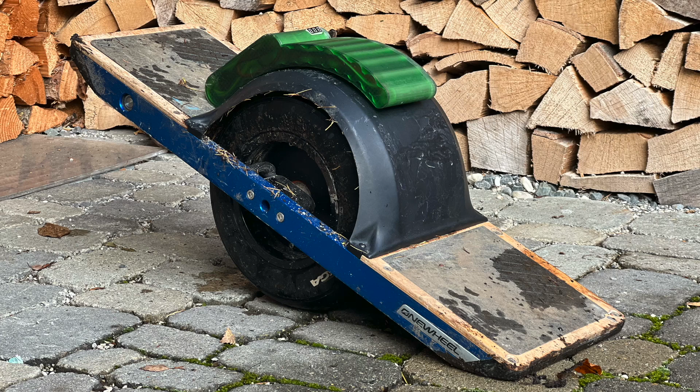So guys, what you see here is actually the result of this video. I'll show you here in a video. Actually, it's gonna be two parts because it's too long. First, a little bit of theory, why and how to build an external battery to a Onewheel One, which is also interesting for the Onewheel Plus and actually for the Onewheel XR, even though the difference is the internal battery of those Onewheels. But I'll come back to this during the video.

So this is my first video of a Onewheel battery build, and actually this is probably my first real battery build ever. So if you're interested, it's quite a long video, but I'm trying to cover everything from theory over planning into building, test running it, and the summary. Have fun.

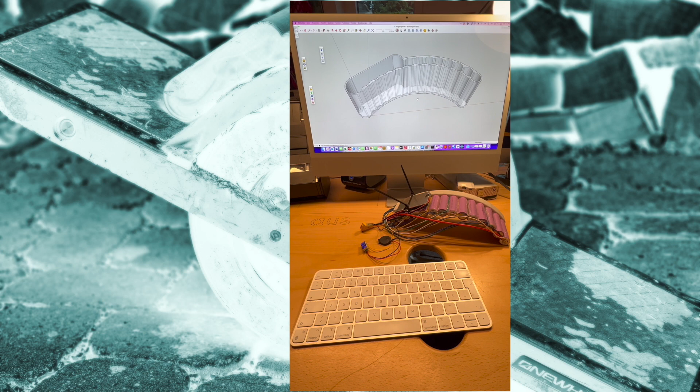So welcome to this video. It's a DIY tutorial about a battery I built for my Onewheel version 1.

I have to give a summary about what I think I know about the batteries in version 1 and in the other versions. So what I know is that in version number 1 there's a 16S LiFePO4 A123 battery cells in the box in the Onewheel, and this battery

can be replaced. I have a used board now, and it's not running very far anymore. So I thought about putting new batteries into the board itself, but I think it still has 70-80% of its original capacity, so it's not completely useless. And what could I expect? Yeah, to just gain another 20%.

But of course, the Onewheel One does not have a great range, so many people play around with range extenders. So I thought about buying a range extender. So in the end, for me, the only option would be to really plug it into the charging port, the XLR plug, because I don't want to open the board, and I don't see any bigger advantages of directly connecting the two batteries, because there's a lot of current running between the two batteries then, and this is something I think people don't really take seriously enough.

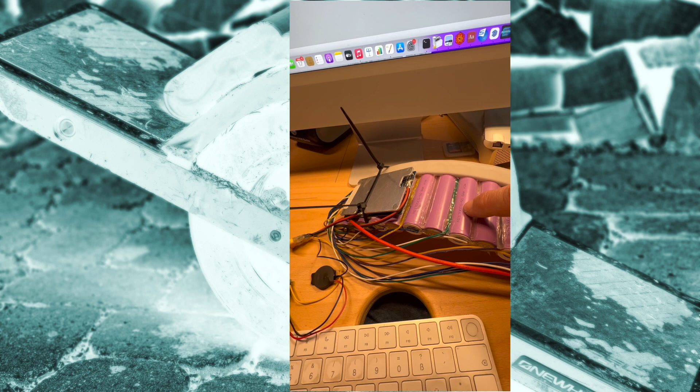It's a 14S. This battery is called BAK N21700CG-50. I'll tell you more about the battery later. So this takes the 14 cells. There's a normal standard BMS that can do 30 amps out. Well, we need 3, 4, 5 amps, officially 3.5 amps to put into the Onewheel. So that's fine to have a small BMS.

I couldn't find a smaller one. I would have taken a smaller one if possible. Yeah, they're just normally in series, so you end up with 14 cells. This is actually everything of the build, and of course I shaped the box. You see here, it's the holder of these 14 batteries.

They're already glued together, so I just take it out of this cradle and push it into this one here. These batteries are going to be glued in a little bit to the bottom, because they have no structure above to hold them down, but they are all glued together. On top there's a BMS area in here, and there's a little window already made for the volt indicator, for the voltmeter, and a little hole here that will take the XT60 plug socket.

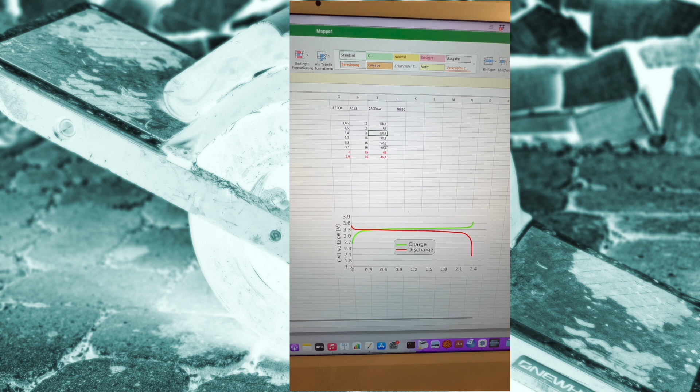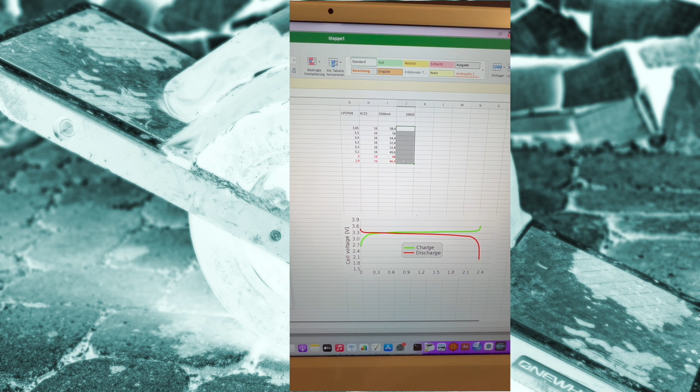So for 80% of your ride you will be in between this and that, between 52 and 49. When I have the voltmeter on my board, in the beginning it's somewhere at 54, because the moment you start riding your motor draws power and it drops. It rapidly goes to 52, 51, 50, 49, and then it goes quickly down to 48, 46. This is actually what you see in your app, from 100 full to 0, where your board stops driving. It will warn you. So what do we do with the range extender here?

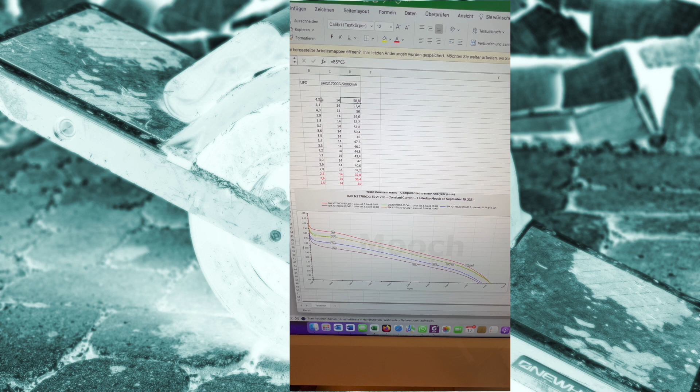With the range extender, first of all, we're talking about 14 cells that are full at 4.2 volts. That gives you 58.8, which is what the original charger of the Onewheel does. It's a good coincidence that 14 times the LiPo is roughly the same as 16 times the LiFePo, very close. So the moment you plug this battery into the charging plug outside your board, it will start charging the battery.

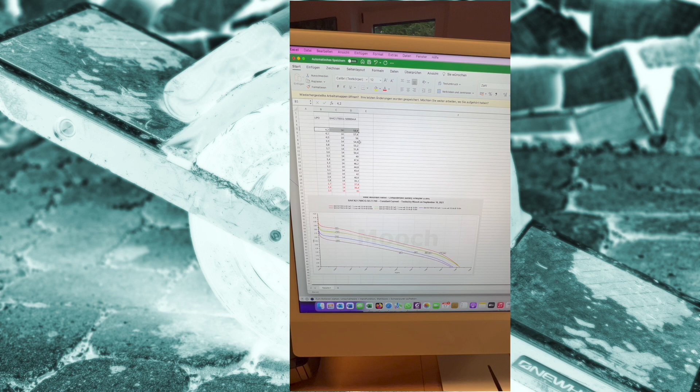And it will charge it with 58.8, like in the ideal world. But of course the motor is running, so it will all go down to 54 point something while you're driving, or riding. So I would strongly recommend to plug in this range extender once you are below 80 maybe. So that's early enough. Don't plug it in too early, otherwise you get some warnings that it might overcharge.

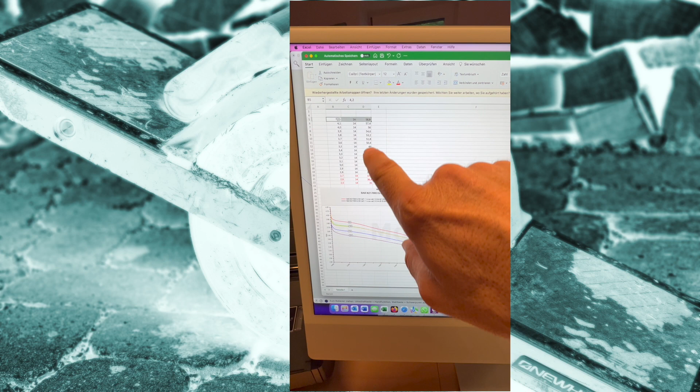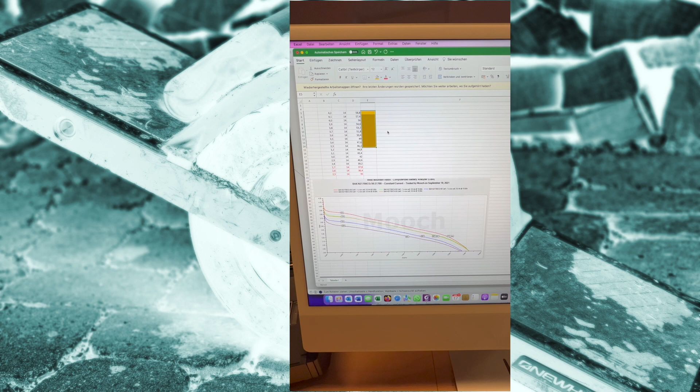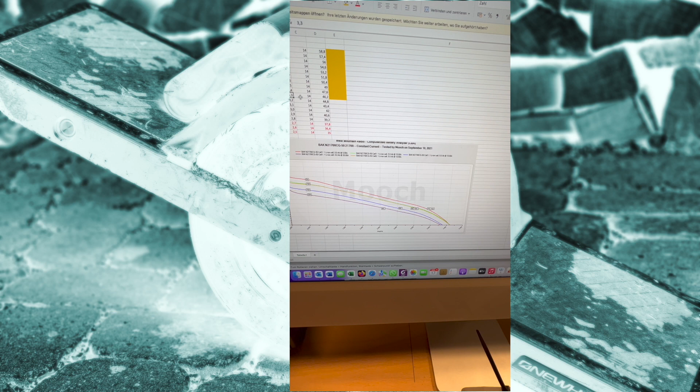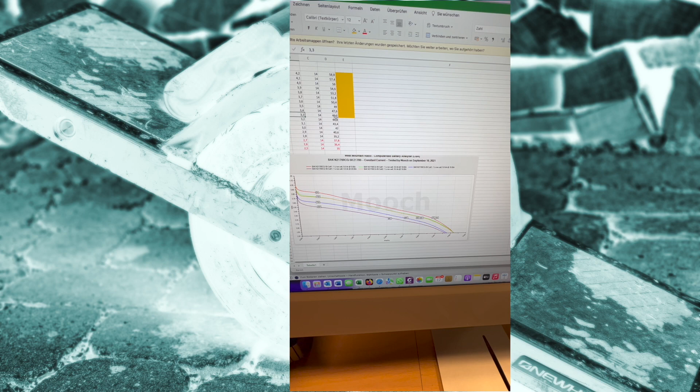So here you see the range of this battery. The full one. This is also 100% of this battery. Well, I can mark it for you. So we see here, if I put this one green here, or I put it in orange. Look, this is what you can use to charge your other battery, because once you're below a voltage of 3.3 in this battery, which is about 30%, 40% of the LiPo left in there, then you're too low to charge this battery

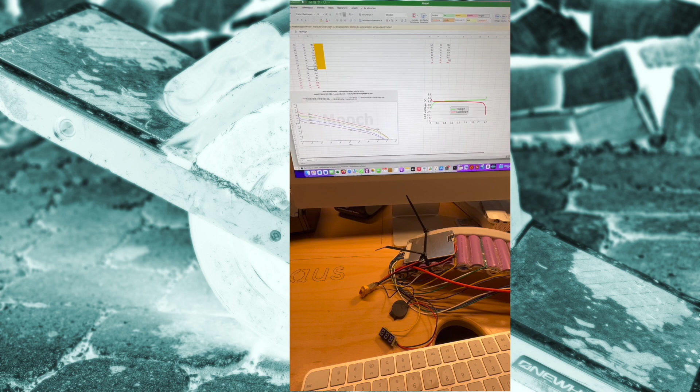and to give your control board in the Onewheel the information that you have enough current to keep on riding. So as said, if you're here on 60-70% out of your battery, then you might still have 20-30% left in the LiPo, and you will finish your ride with a non-emptied battery.

The only way to overcome this situation would be to boost the voltage on this battery at that moment, but then you need a booster with 3.5 amp. That is another block of this size. Could be interesting for some people. It could sit on here. Probably it would raise the complete box by this size, and then this package would always, until it's empty, give out 58. You could set a booster to 58, and then you could discharge it completely, which would be nice. Maybe I try it another day. But at the moment, you can only use 70% of this.

Why do I do this? This battery, you can buy it for probably €4 a piece, 14 times. So that's a little bit more than 50, maybe €60, only the batteries. That's a €20 BMS, it's 80. Some resin to print this, another €10-15, a few cables. This one is a €1 piece, this is a 20-cent piece. So the whole battery, just the materials, is €100.

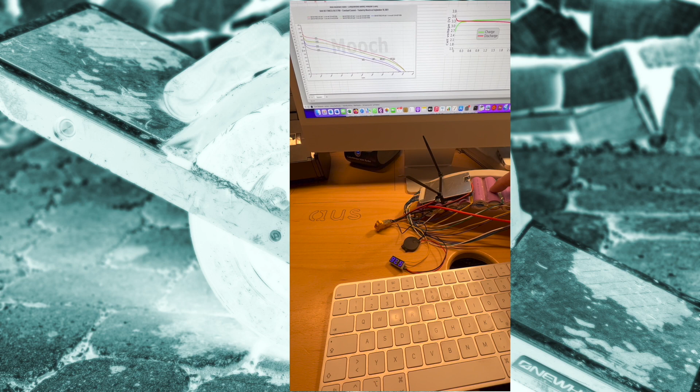So I compared it to the Ego, this big block battery from household machines. You know them, the Egos, the big block green ones, and it's like maybe 1/4 of the price of the Ego. And actually, they sell this range extender with the Ego for the Onewheel 1 and Onewheel Plus. It will do the same, right? It's also a LiPo battery, and at a certain point it will be too low voltage to charge your LiFePo battery. So for Onewheel 1 and Onewheel Plus, which I think is the same battery, this is a good solution.

The other solution you would have is to go with the original A123 batteries for an external range extender. It has 2,500 milliamps. I did a check with this one while riding it. I can take out 3.5 amp hours, 3,500 milliamp hours out of this battery. So it's 1,000 milliamp more netto which I can do with this one.

And the other battery, the original LiFePo, which you could use for an external range extender, which you could empty completely because it's the same range of voltage, would cost you at least double the price, and the batteries are slightly bigger. It's not 21, it's 26. So the whole block will become bigger, it's more expensive, and you have less amp hours. So that's why I chose this battery. Well, this is my opinion, and I totally understand if there's 100 different opinions.

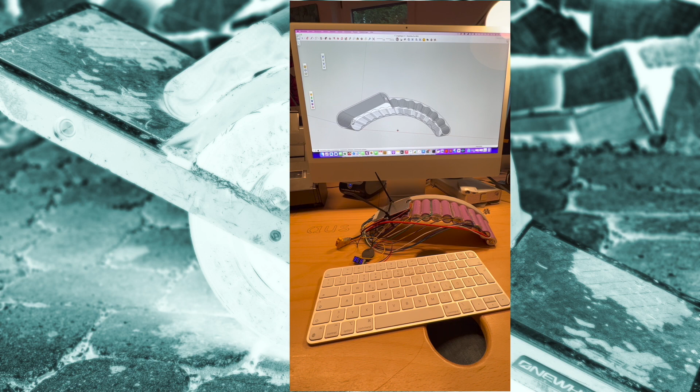I will show you the rest in the video when I take the print out of the resin printer, when I put these batteries into the new box. And I'll show you more when I install it and test ride it. So I hope you enjoyed the video so far, and it continues in a few seconds, hopefully.